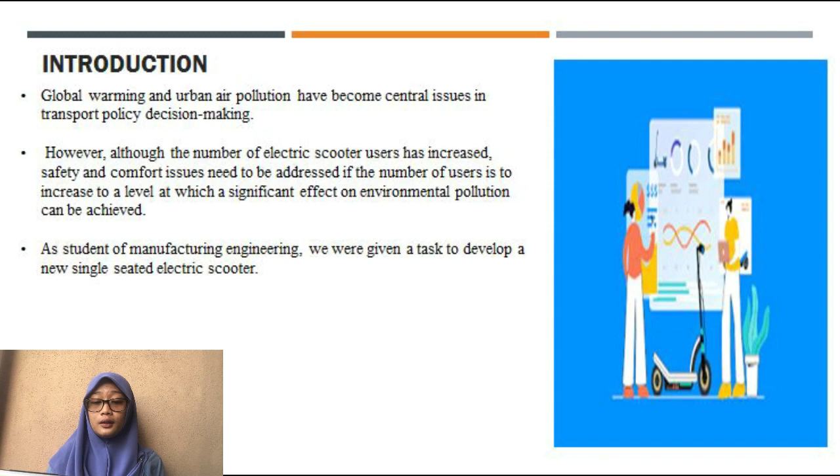As students of manufacturing engineering, we were given a task to develop and achieve, through DFE principles and approach, the early design stage of product development of an electric scooter. My second point will be background.

An electric scooter is a vehicle powered by an electric motor in order to move. It is also known as an e-scooter. For the power supply of the electric motor, certain countries use different power because it differs by country. Basically, the rechargeable battery that is used for the e-scooter can move it at 15 kilometers per hour.

The invention of the electric scooter is proof that the engineering fields keep advancing. The invention of the electric scooter made it replace the old scooter in the market. Although the electric scooter uses an electric motor, it is still called a scooter rather than a motorcycle.

This is because its identity as a scooter is still fixed, as most of its parts belong to a scooter. So it is not included in transportation law, which requires a certificate to operate a motor vehicle. A license is not needed to ride an electric scooter. The electric scooter is not a fully motorized vehicle. It is just a semi-motorized scooter, which still has brakes and frame design and so on.

Electric scooter users commonly use this power supply on the electric scooter. This kind of battery is rechargeable and light, which makes the design of the electric scooter more handy and easy. The electric scooter is not like a motorcycle in many concepts, either its design or its power supply. Besides that, the electric motor also uses low power compared to a motorcycle.

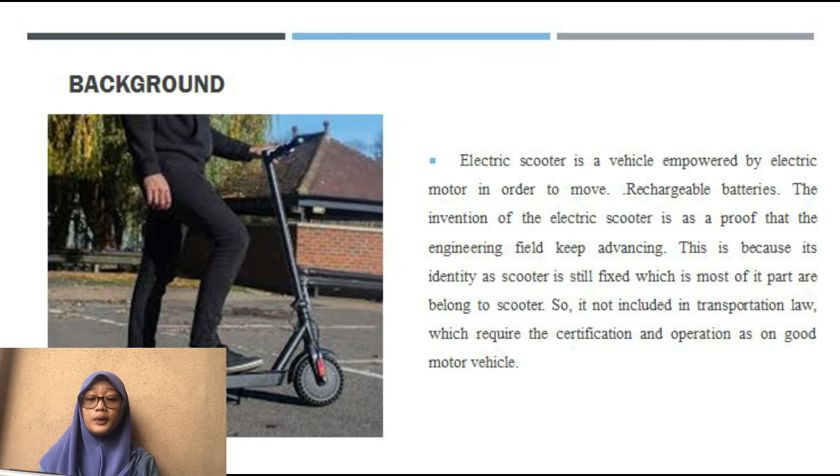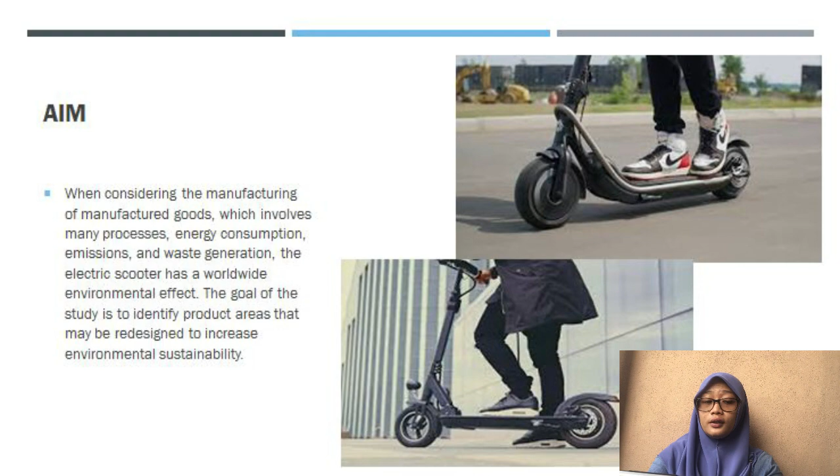When considering the manufacturing of goods, which involves many processes, energy consumption, emission and waste generation, the electric scooter has a worldwide environmental effect. The goal of the study is to identify product areas that may be redesigned to increase environmental sustainability. My next point will be objective.

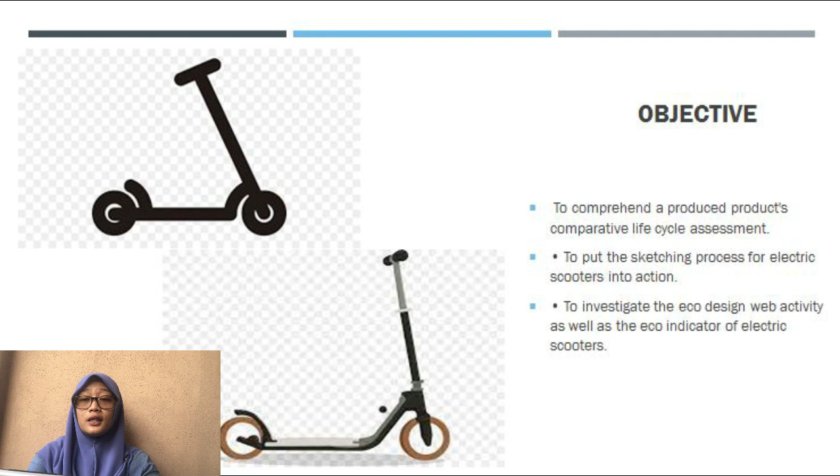Firstly, to comprehend a comparative life cycle assessment of a product. My second point will be to put the sketching process of the electric scooter into action. My last point will be to investigate the eco design web activity as well as the eco indicator of the electric scooter. We move on to the next point, that is concept.

The concept of the project is to provide more exposure and a better understanding of how to execute design for the environment, from the standpoint of the life cycle studies of the electric scooter.

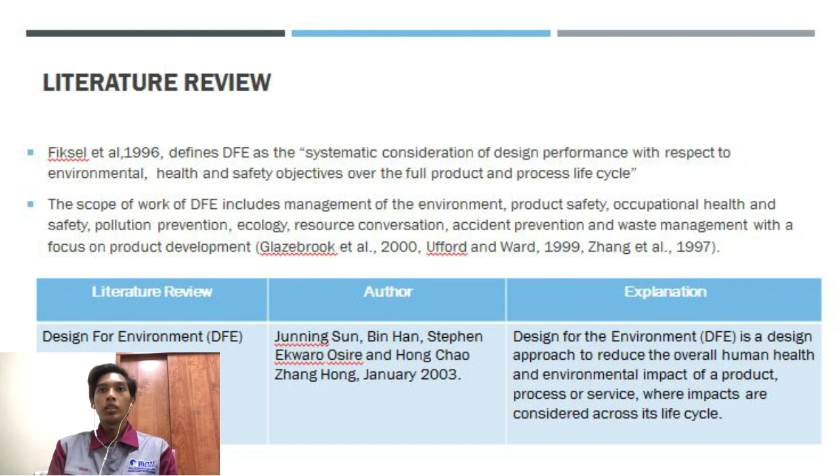The explanation of this research is design for environment, DFE, is a design approach to reduce the overall human health and environmental impact of a product, process or service, where impacts are considered across its life cycle.

Ekvall et al. 2007 said in his research, life cycle assessment is a methodology for evaluating the environmental impact of a product or process from its origin to its final disposal. LCA has been widely used in assessing waste management systems since it compares the environmental performance of different waste management options.

The explanation of this research is life cycle assessment, or LCA, also known as life cycle analysis, is a methodology for assessing environmental impact associated with all the stages of the life cycle of a commercial product, process or service. For instance, in the case of a manufactured product, environmental impacts are assessed from raw material extraction and processing through the product manufacture, distribution and use to the recycling or final disposal of the materials composing it.

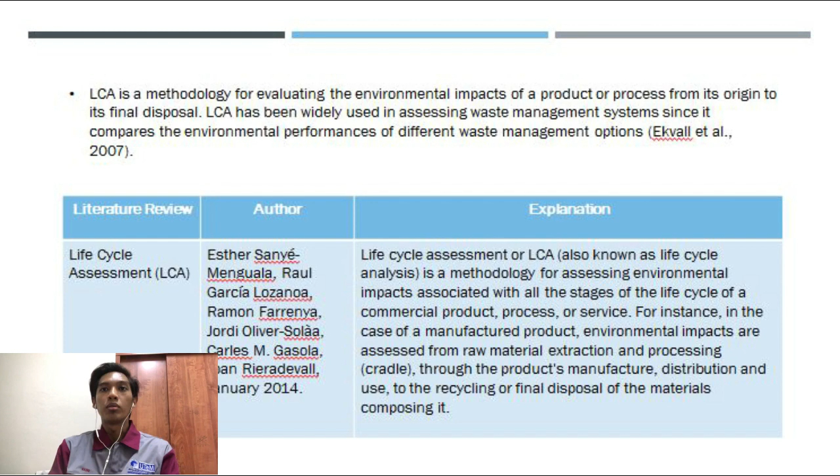Boks 2006, Borchardt 2011, Brezet and Van Hemel 2007 and other researchers said in their research, eco-design offers different benefits and opportunities to companies, not only environmentally but also from the economic and social perspective. The environmental performance of a product improves, such as footprint, by optimizing input and output of the production process, reducing resource consumption such as energy, material, water, the environmental impact such as emission and waste, and increasing the efficiency of the system.

The explanation for this research is the eco-design web is a useful tool to help students analyze an existing product or design. It can also be used to indicate areas of the product that can be redesigned to improve its environmental sustainability.

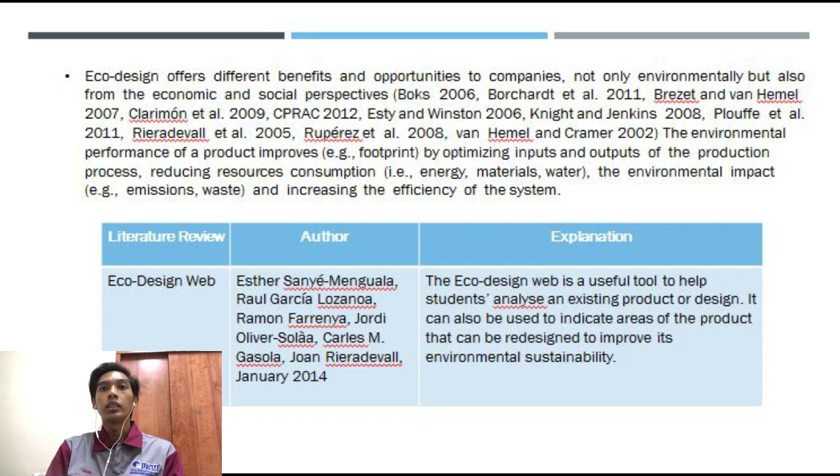Glavič 2012 said in his research, eco-efficiency is a management strategy of doing more with less. It is based on the concept of creating more goods and services while using fewer resources and creating less waste and pollution. Eco-efficiency is a sustainability measure combining environmental and economic performance.

The explanation for this research is the eco-efficiency indicators are designed to capture the ecological efficiency of growth by measuring the efficiency of economic activity, both in terms of consumption and production, and its corresponding environmental impact. The ultimate goal of EEI is to provide governments with a practical tool to measure their performance in the context of eco-efficiency and harness the concept of eco-efficiency for socio-economic policies pertaining to environmental sustainability.

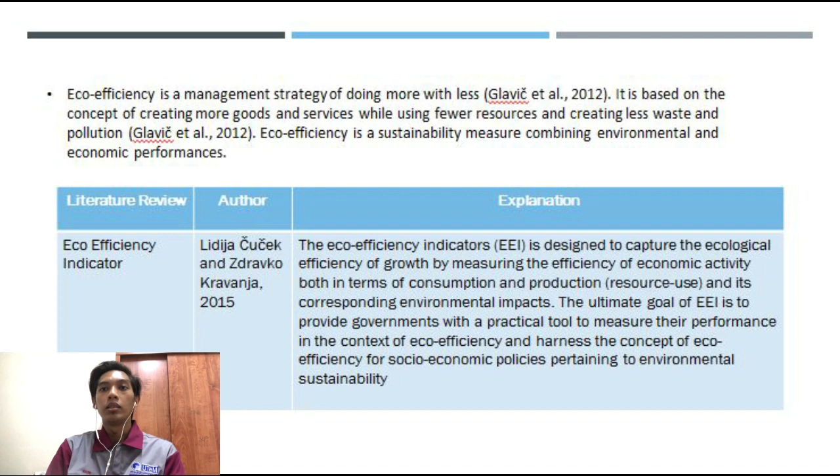My matrix number is B0517101004. Today I'm going to talk about methodology, and the first thing I'm going to talk about is the product: the electric scooter frame or chassis. There are a few materials that are popular to develop the scooter frame. Its purpose is to make the scooter lighter with a strong frame. The types of material commonly used to develop the scooter frame are carbon fiber, steel and titanium.

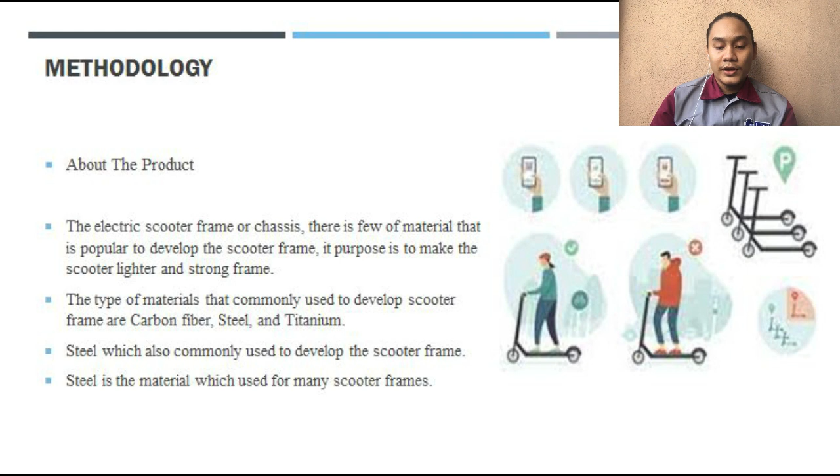Steel is commonly used to develop the scooter frame. A steel frame can be repaired at low cost, and when there is damage, a steel scooter frame can show stress before the frame breaks. A steel scooter frame breaks slowly compared to an aluminium frame, which breaks suddenly when there is failure on the frame.

Next, I'm going to talk about the life cycle assessment (LCA), a methodology for assessing environmental impact associated with all stages of the life cycle of a commercial product, process, or service. In the case of a manufactured product, environmental impacts are assessed from raw material extraction and processing through the product manufacture, distribution and use to the recycling or final disposal of the materials composing it.

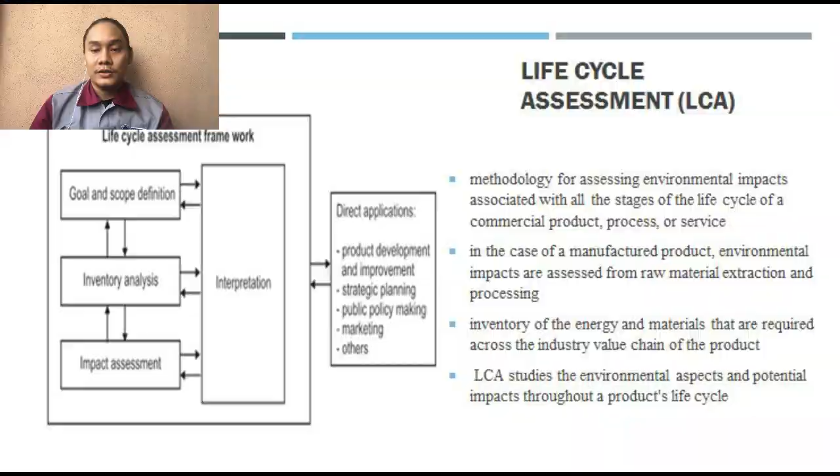It takes an inventory of the energy and materials that are required across the industry value chain of the product, process or service, and calculates the corresponding emissions to the environment. And lastly, the LCA studies the environmental aspects and potential impacts throughout a product life cycle, from raw material acquisition through production, use and disposal. Second, I'm going to talk about the eco-design web.

Eco-design is an approach to designing products and services with special consideration for the environmental impact of the product during its whole life cycle, defined as the process within design and development of the integration of environmental considerations into product and service design and development, with the aim to reduce the environmental impact of the product through the life cycle, that supports product development with certain considerations or tasks, typically arranged in software or written in guidelines.

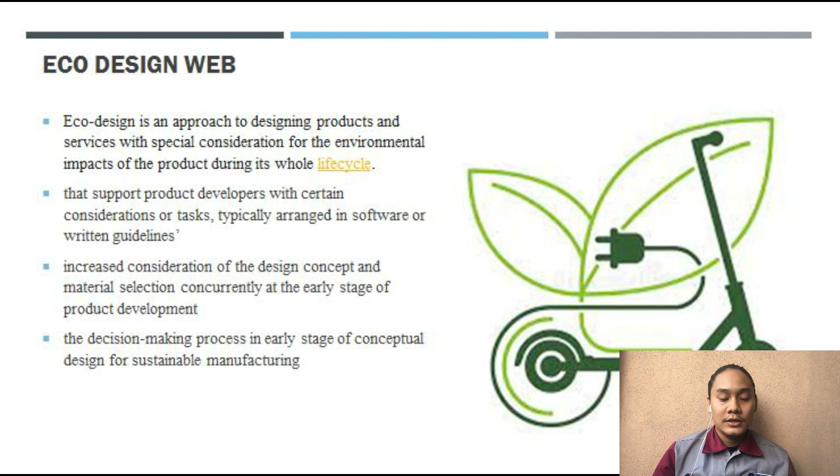Increase the consideration of the design concept and the material selection concurrently at the early stage of product development. Minimize the environmental impact due to the product, material and related processes. Creative approaches have emerged as the driving force to innovate the process. The decision-making process in the early stage of conception. Design for sustainable manufacturing. And lastly, I'm going to talk about the eco-indicator.

The eco-indicator provides decision makers and the general public with relevant information on the current state and trends in the environment. Second, it helps decision makers better understand the cause and effect relation between the choices and practices of business and policy making versus the environment. And last, monitoring to assess the effectiveness of measures taken to enhance ecological goods and services.

Next, I'm going to talk about the result. Here are the design options for our product. And these are the 15 parts of the product, which are handlebar, quick release, tube, head tube, sensor, battery box, deck, PU wheel, rear wheel, motor, charging plug, front fork, front fender, front wheel and drum brake.

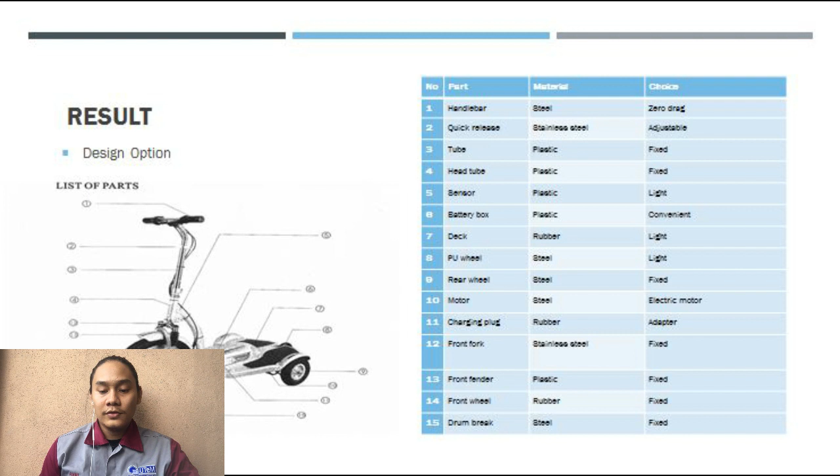Then these are the tree processes. For the stainless steel, the process is pressing, and the steel process is bending. For the plastic, the process is injection molding, and the rubber is mixing. The stainless steel, steel and plastic are assembled and transported, and then packaged. After that, it is used by people, and then goes to disposal, or from the packaging it will go to the disposal landfill.

For the eco-design, for the new ways of doing, it is lightweight, comfortable to ride, has agility and is durable. For the material selection, we have plastic for the tube and sensor. Rubber is for the deck and front wheel, and steel is for the chassis and the motor. For the material usage, we have handlebar, tube, sensor, deck, rear wheel, motor and front fork. And the distribution is from packaging and then shipping from China.

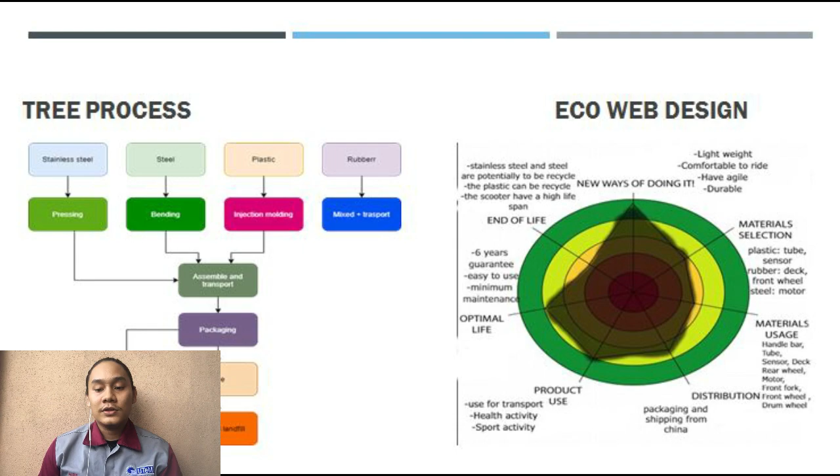The product is used for transport, health activity and sport activity. The optimal life has a 6-year warranty, easy use, minimum maintenance, and the end of life. Stainless steel and steel have potential to be recycled, and the plastic can be recycled, and the scooter has a high lifespan. For the eco-indicator, the production covers material, processing, transport and extra usage.

The total for the production is 803.106347. The number is not high because the production of material is very low. And for the usage, the total is 34.9965, which is in the middle. The disposal is very low because we use steel and stainless steel only, and the total is 6.7740. For the calculation of transport from China, the total is 23.26, and the distance distributed to the shop is 0.627 tkm.

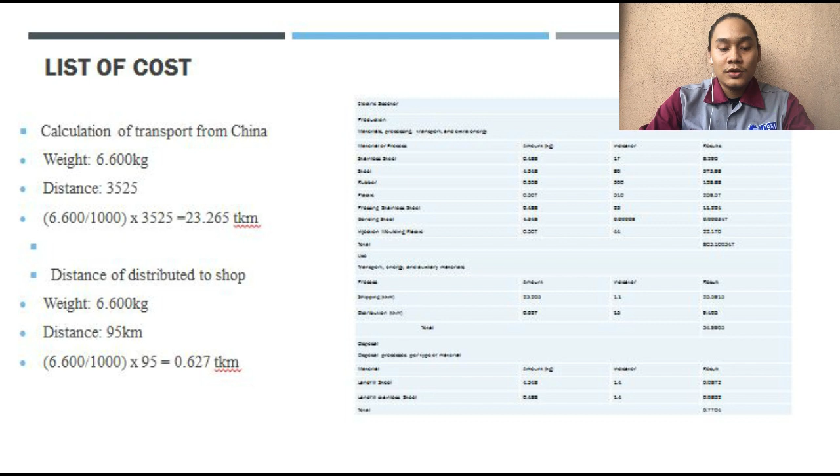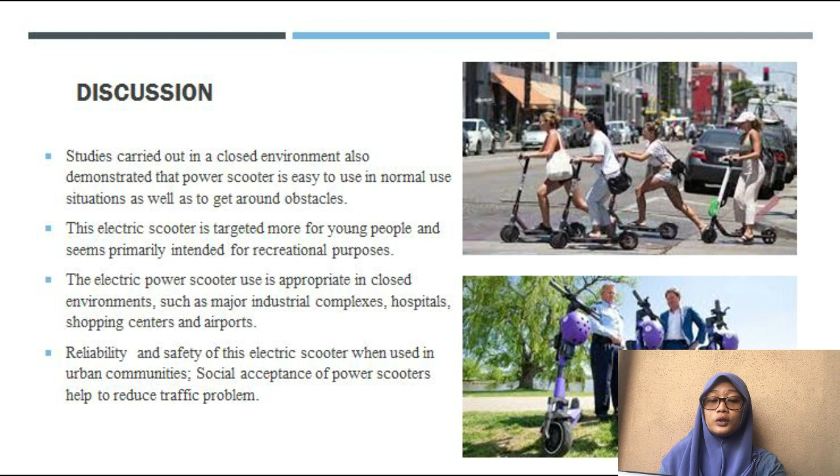Discussion. Studies carried out in a closed environment also demonstrated that the electric scooter is easy to use in normal situations as well as to go around. The electric scooter is targeted more for young people, seemingly primarily intended for recreation purposes. Electric scooter use is appropriate in a closed environment such as industrial complexes, shopping malls and others. Reliability and safety of the electric scooter when used in urban communities. Social acceptance of the electric scooter helps reduce the traffic problem.

Last but not least, the conclusion. Due to many problems of congestion, pollution and urban mobility, new modes of transportation such as the electric scooter device seem to be an alternative to worldwide automobile use. This device also compares favorably with other types of vehicles, particularly in terms of stability, where they seem superior to other vehicles such as bicycles and motorcycles.

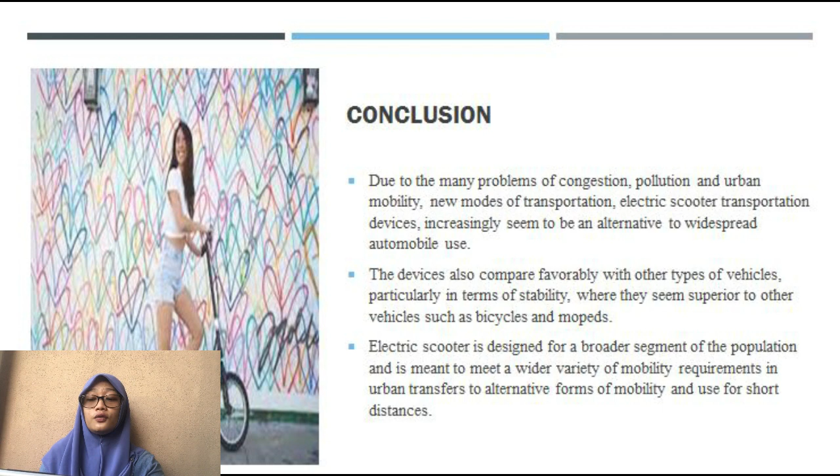The electric scooter is designed for a broad segment of the population, and it's meant to meet a wide variety of urban mobility requirements, as an alternative form of mobility used for short distances.